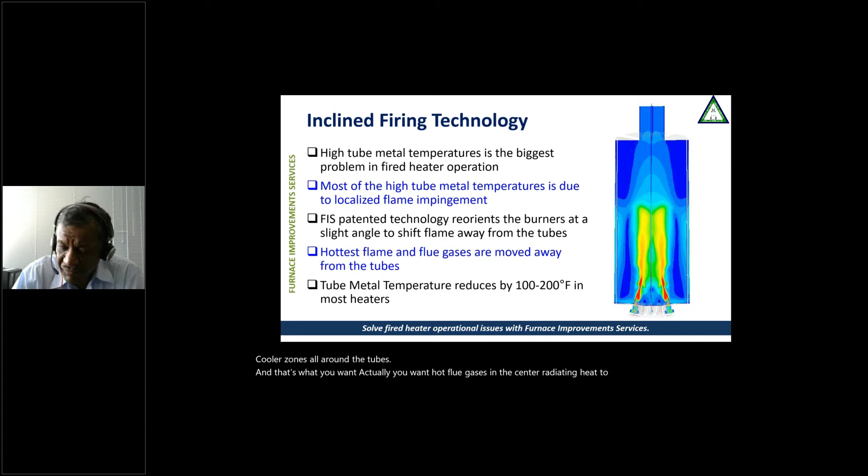This slide shows the temperature profiles, and you can see the flames are in the center and the rest is a lot cooler zones all around the tubes. And that's what you want actually - you want hot flue gases in the center radiating heat to the tubes, having uniform heat transfer.

So our technology is eminently suitable for existing heaters with ultra low NOx burners. We have seen that these heaters were originally designed with standard burners. When the standard burners were replaced with ultra low NOx burners, the heater started having hot spots and flame impingement. In most cases, the burner to tube clearance reduced, causing problems in operation.

It is not possible to enlarge the radiant section to keep flames of the burners away from the tube as possible. And we have overcome this limitation without increasing the cost of the heater, without changing the design of the heater, by putting these burners at a slight angle of about 5 to 7 degrees. Most of the time, you won't even notice it.

Flames of the ultra low NOx burners could be anywhere between 15 to 25 foot long, even taller. So when we incline these burners, these flames start moving away from the tubes, and we increase the clearance between the burner edge, flame edge, and the tube almost like 1 foot for every 10 feet of flame length. If it's a 25-foot flame length, we've added another 2.5 foot clearance between the burner flame edge and the tube, and that's very, very important.

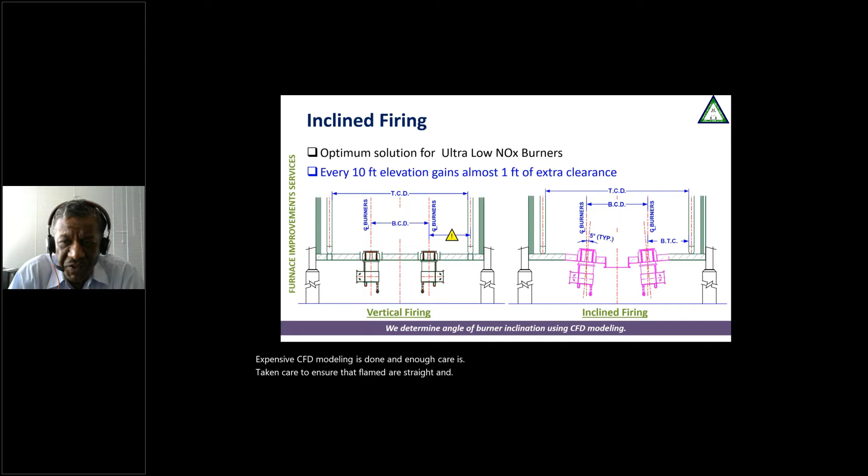We make sure that extensive CFD modeling is done and enough care is taken to ensure that flames are straight and separate. So we have not had any cases of any flames coalescing taking place in any heater.

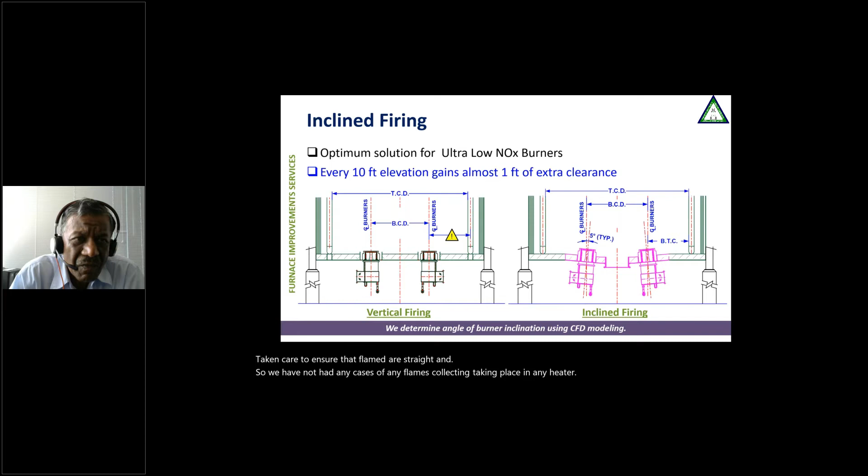Also, the flames are not hot at the bottom, they are generally hot at 1/3 or 2/3 height - that's where they have higher temperature. So it really helps to keep the flames away from the tube. This is at a 7-degree angle.

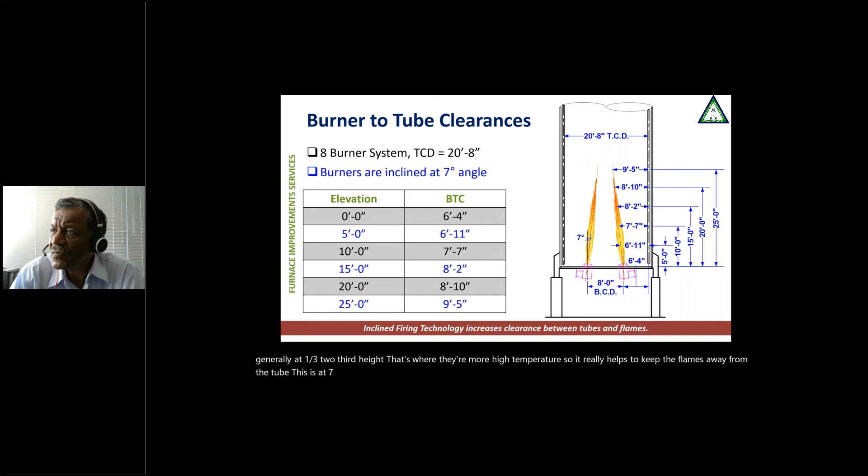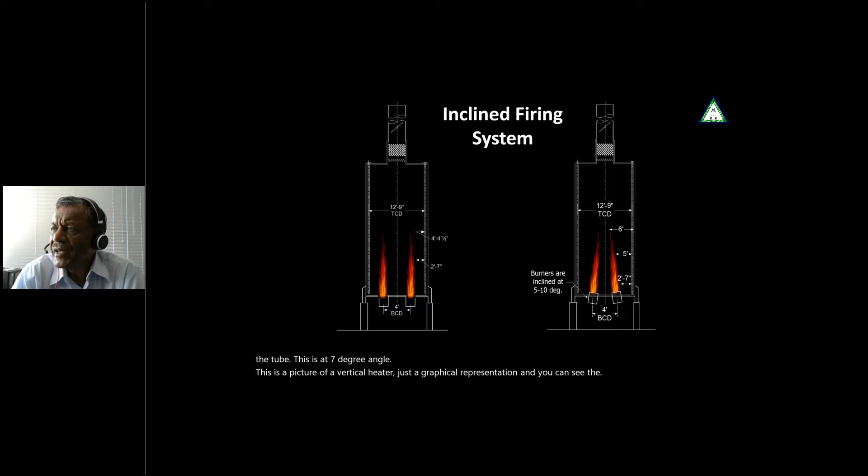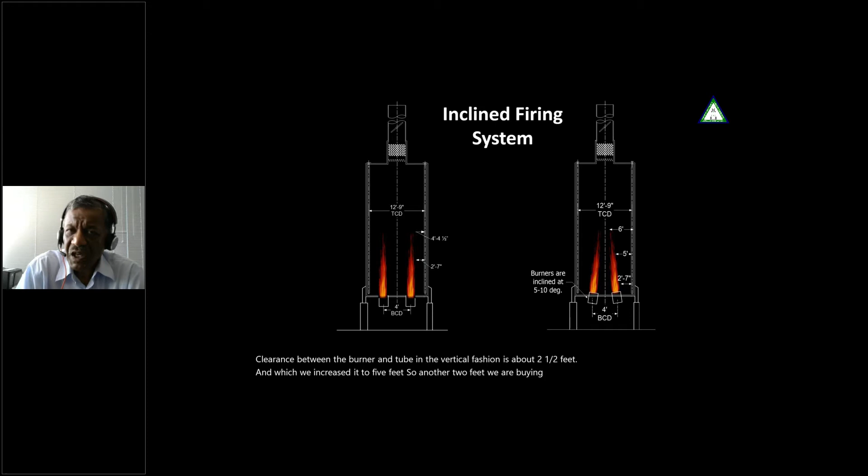This is a picture of a vertical heater, just a graphical representation, and you can see the clearance between the burner and tube in the vertical fashion is about 2.5 feet, which we increase to 5 feet. So another 2 feet we are buying - that's basically what our technology does, just move the flame away.

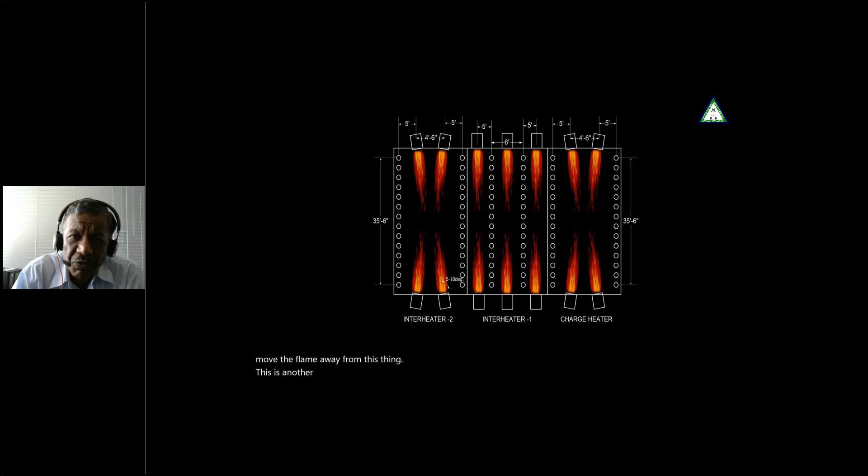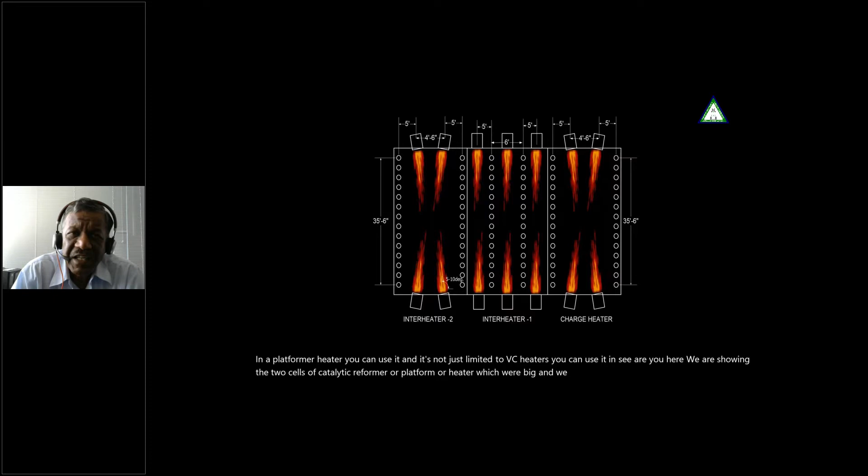This is another one, in a platformer heater. You can use it - it's not just limited to VC heaters, you can use it in CRU. Here we are showing the 2 cells of a catalytic reformer or platformer heater, which were big, and we can use burners in inclined fashion, firing towards the center and moving the flames away. Very simple concept.

Double-fired coker heaters have become very common in the industry. We find many are suffering from high tube metal temperatures from day one. The high tube metal temperatures have been caused by long burner flames and inadequate burner to tube clearance.

We did a study for a client on their double-fired heater and found that the burner flames were almost touching the tube, or almost like 6 inches away. We modeled the same burners at a 5 to 7-degree angle, and we were able to see a big difference in tube metal temperatures. The flames basically moved away from the tube and started hugging the refractory. We increased the clearance by almost another 2 feet, and the TMTs came down by more than 100 degrees, which is a big number for a coker heater.

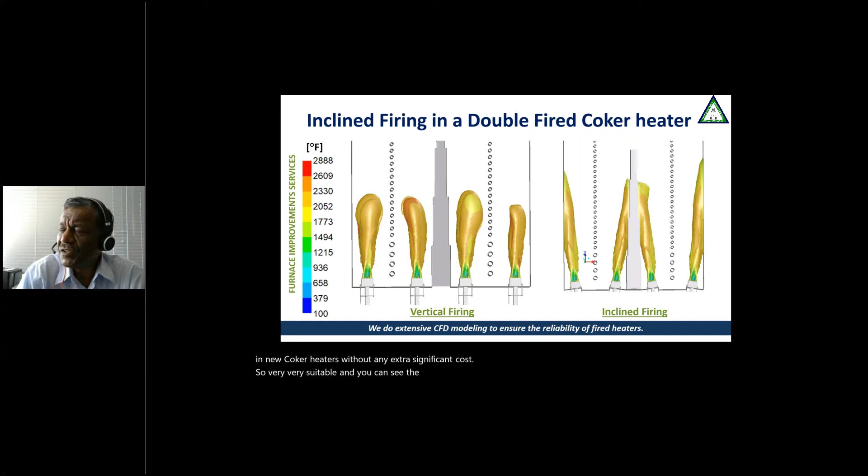This firing pattern can also be used in new coker heaters without any significant extra cost. So very, very suitable. You can see the flames over here. This is an actual study we did for one of our clients.

This is another heater we have done, for horizontal tube end wall fired heaters. We don't build too many end wall fired heaters, but this is an old crude heater with end wall fired burners. The heater was experiencing high tube metal temperatures, and we did the CFD to show, and you can see yourself the color of the flames. Red is basically much more concentrated in the center, and the tubes are experiencing a lot lower temperatures.

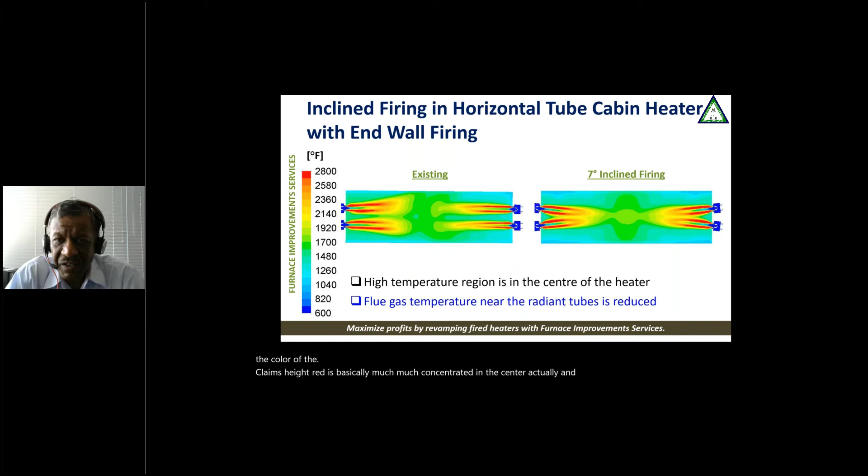We even did it in ethylene crackers. We did a modest CFD model of a furnace, and you can see the difference between vertical firing and inclined firing. In our model, the flue gas temperature is a lot lower, almost like 100 to 150 degrees lower, and the tube metal temperatures are also lower, with the flames firing a lot more towards the wall.

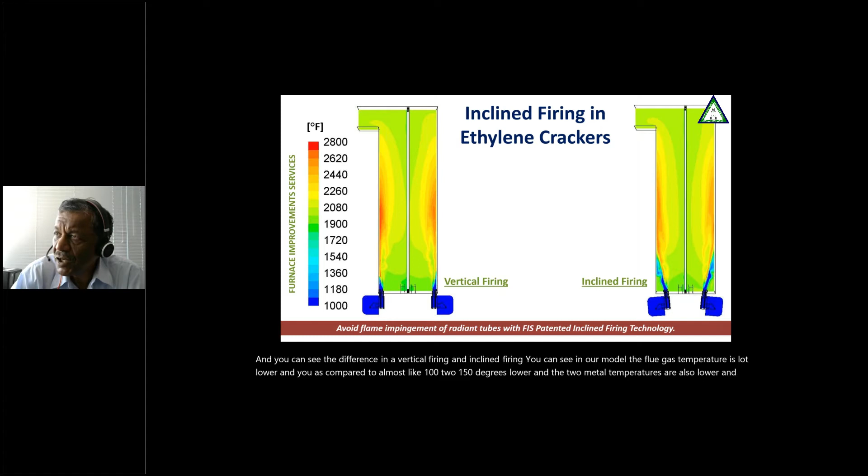So it can even be done in ethylene crackers if high tube metal temperatures are an issue. And I know ethylene crackers have a big issue with tube metal temperatures.

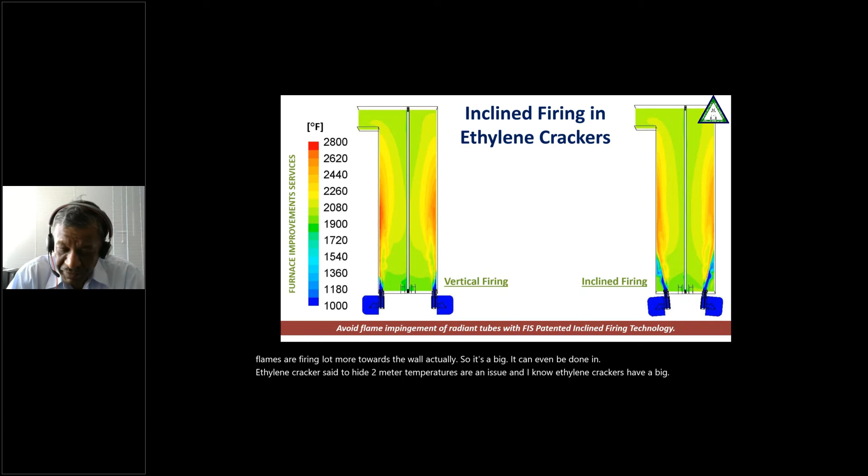So today we are going to be talking about a case study on a crude heater. This is a case which I first told you about when we started. We got a second chance to look at that heater again in 2014. The client had gone ahead and replaced the existing burners with new ultra-low NOx burners and air plenums in 2011. Even after doing that revamp, they were still having lots of issues in the crude heater. So they contacted us in 2014, and we did the study and later on the project.

This was a vertical cylindrical balanced draft heater with a common air feeding system. The heater was originally built in 1976 and revamped in 2000 and again in 2011. The client was facing a number of problems, including capacity limitation due to high tube metal temperature. The situation was so bad that they had wrapped some of the radiant tubes in ceramic fiber blanket. They were having flame impingement, which was leading to soft coke deposition in the radiant tubes.

The client had other issues like combustion air maldistribution across burners, and they could not get full capacity. So we did an engineering study to improve the reliability of the existing crude heater, improve performance of existing burners, and mitigate flame impingement. They wanted us to restore the capacity of the heater. The heater was facing combustion air shortage during natural draft operation. So we looked at several ways of improving the heater reliability.

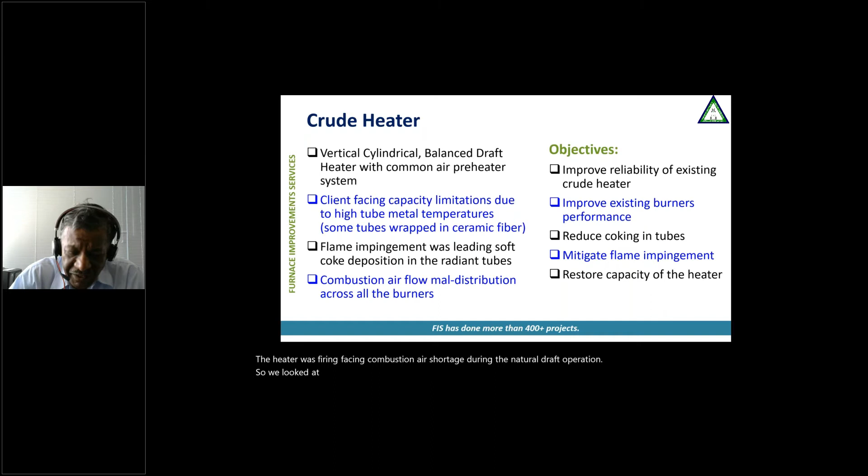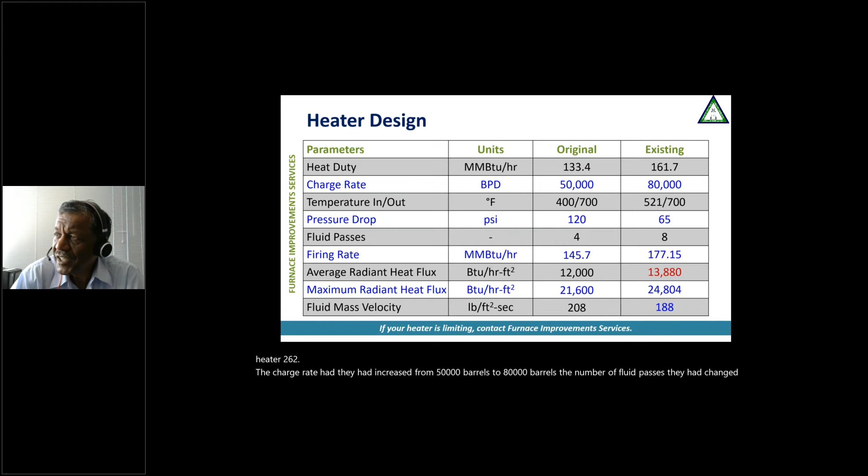So this is the heater design, original heater design versus existing heater design. Original was 133 and they had already expanded the heater to 162. The charge rate they had increased from 50,000 barrels to 80,000 barrels. The number of fluid passes they had changed from 4 to 8. The flux had increased from 12,000 to almost 14,000.

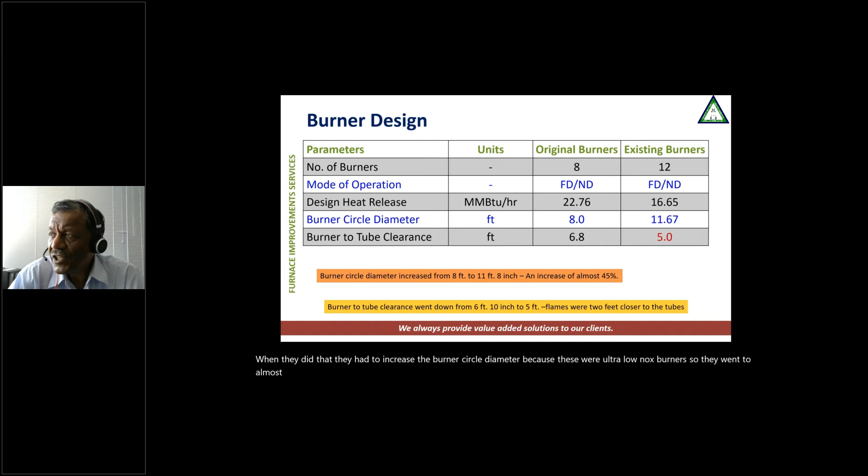On the burner side, the original heater had 8 burners of 22 million BTUs each at 8-foot BCD, and they had changed to 12 burners of 16 million BTUs each. When they did that, they had to increase the burner circle diameter because these were ultra low NOx burners, so they went to almost 11 foot 8 inches, an increase of 45%. As a result, the burner to tube clearance was lower by about 2 feet, and this was not even meeting API.

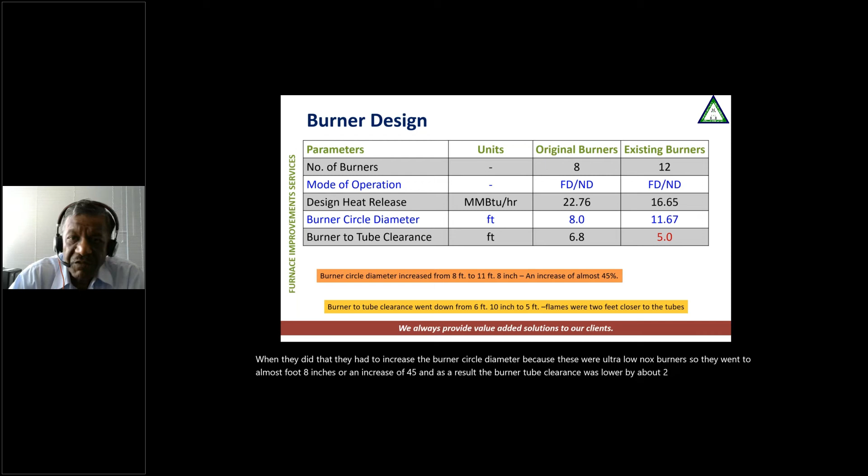So this heater, they gave us operating data for it. Let's look at the tube metal temperatures. They were exceeding 1100 and sometimes even 1200.

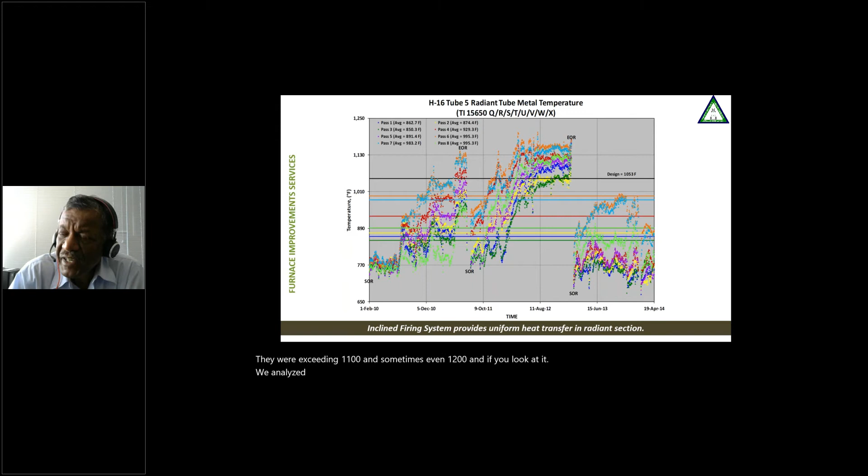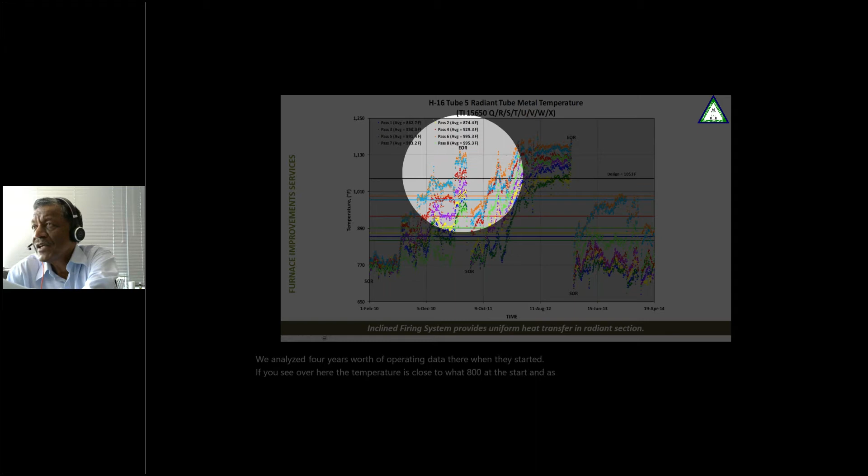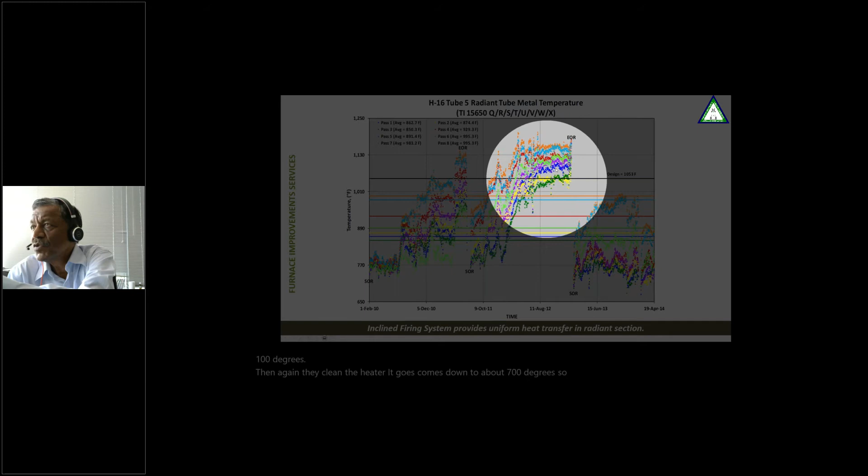We analyzed 4 years worth of operating data from when they started. If you see over here, the temperature is close to about 800 at the start. As you keep going up, it goes up to about 1100 degrees. Then they clean the heater, and it comes down to about 700 to 800 degrees. Then again it goes up to 1100 degrees within a span of 1 year. Again they clean it, so it was becoming a big problem for them.

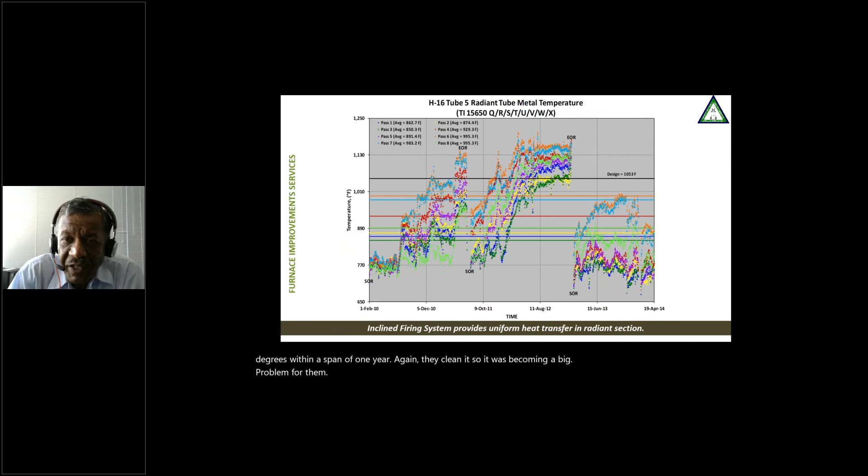You expect crude heaters to be running for at least 5 years. If you have to shut down the heater in 1 year, it's going to cause a lot of profit loss. So the high tube metal temperatures were really, really acute.

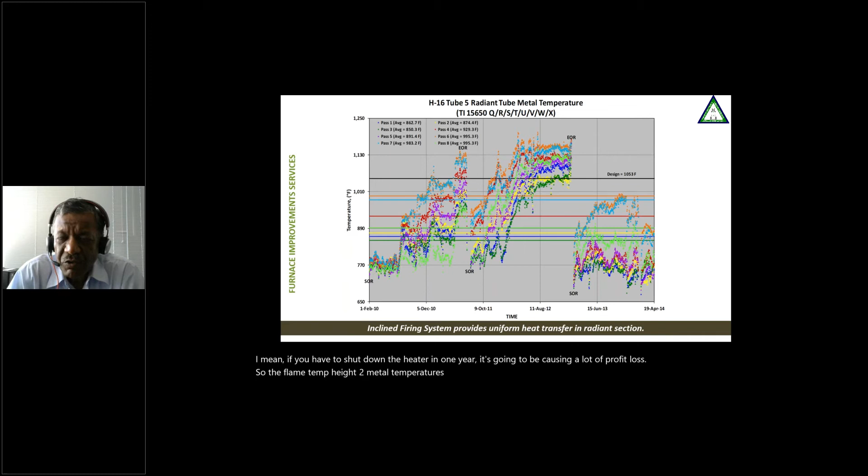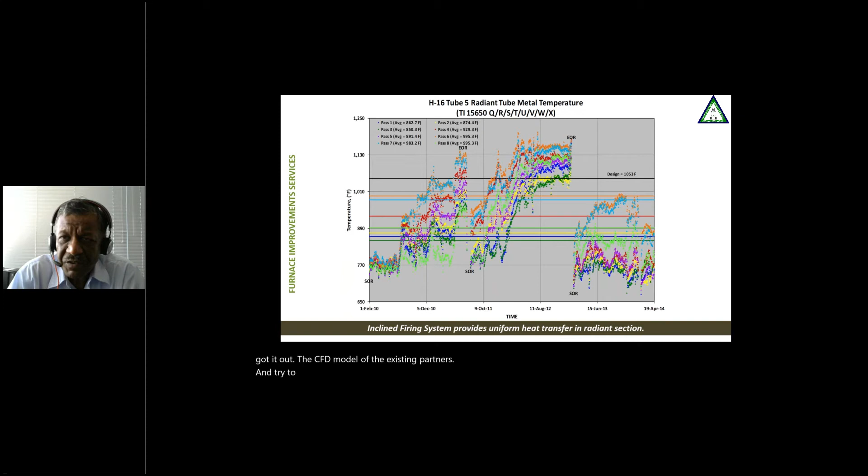We carried out the CFD model of the existing burners and tried to understand what the problem is, and then we worked on the solutions.

The client had 3 major shutdowns, in September 2010, July 2011, and January 2014. They were not able to get an outlet temperature of 700 degrees, running 57 degrees lower. The maximum tube metal temperature was exceeding the design value by almost 150 degrees, so they were almost reaching the maximum allowable tube metal temperature. The heater operation was severely limited, that's basically what the situation was in this crude heater.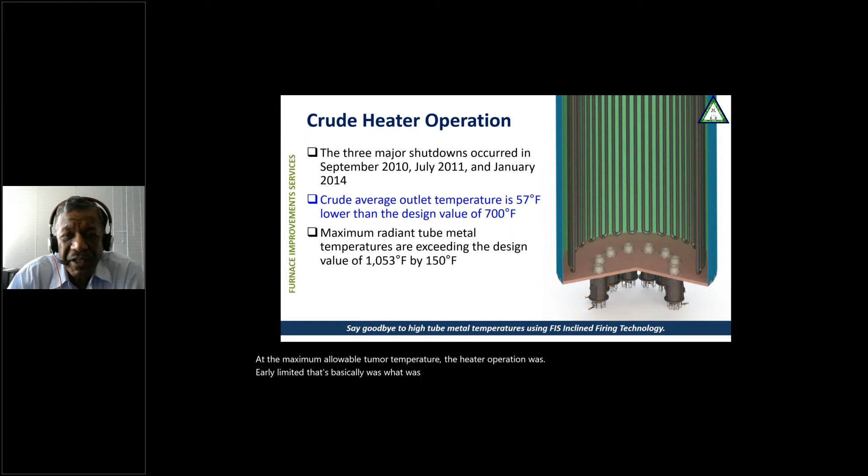This crude heater was a vertical cylindrical heater with a 22-foot tube circle diameter and 63-foot height. Burners were installed at 11-foot 8-inch burner circle diameter. The burner-to-tube clearance should be 5-foot 6-inch, but they only had 5-foot.

When we started looking at it, we said we would like to change the existing burners and put them at an angle. So we went in with new ultra-low NOx burners and did CFD modeling at a lower burner circle diameter to increase the clearance from the burner to tube, at least meeting API 560.

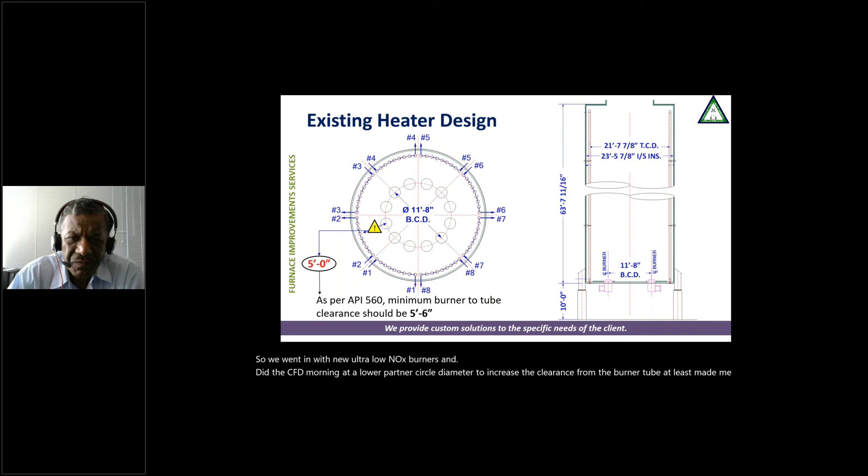So we analyzed the problem and recommended some simple solutions. The first was how to solve the flame impingement problem. We said we'll put new burners on a tighter BCD, use inclined firing, and use CFD to optimize the BCD as well as the inclination. We ended up doing about 6 iterations of different angles and different BCDs to arrive at the best combination.

We looked at the plenum and redesigned it, simplified it, and made sure all the burners are getting an equal amount of air using CFD. They were having limitations on natural draft, so we put fresh air doors, redesigned and relocated. They were also having combustion air limitations, so we recommended a new FD fan of higher air capacity. So that's basically the modifications we did for them.

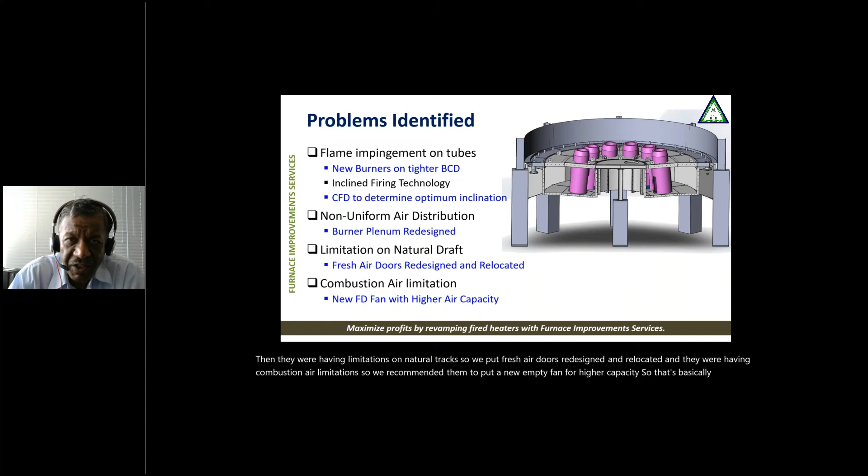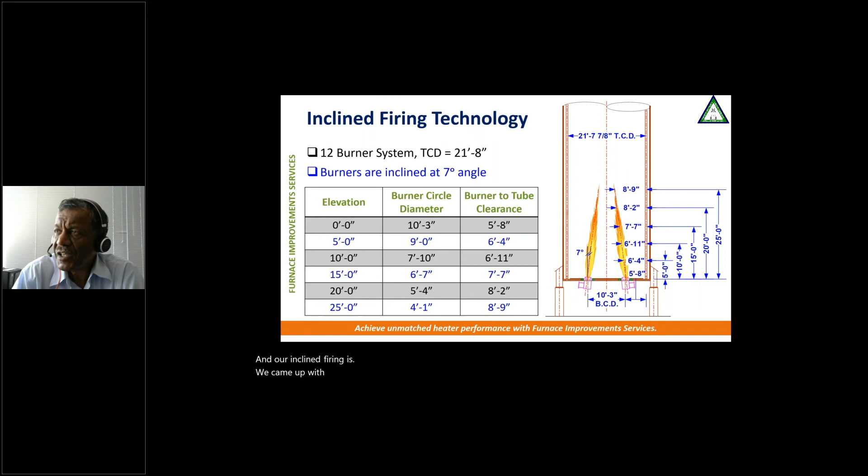Our inclined firing design came up with a 10-foot 3-inch burner circle diameter, with burners installed at a 7-degree angle. We started with a 5-foot 8-inch clearance, a little more than API 560, and by the time we got to the 25-foot flame length the burner vendor had promised, we had an additional 3 feet, giving us an 8-foot 9-inch clearance.

So we were able to create, even between the burners, a big gap.

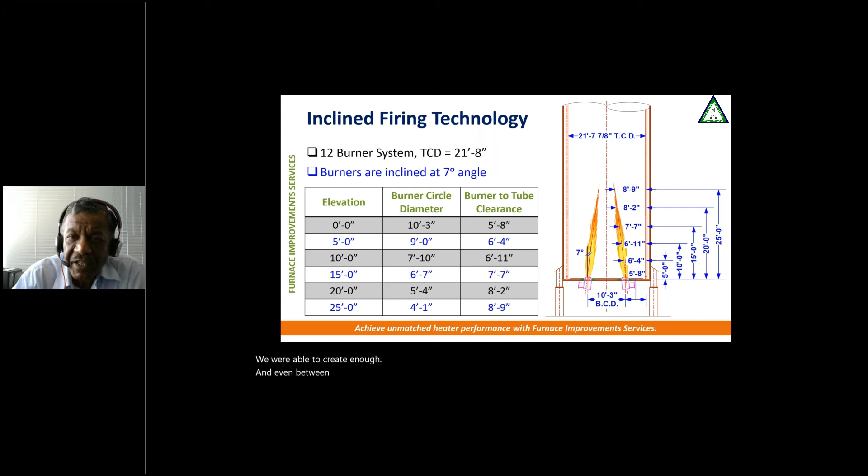Now I want to show you some slides of the CFD model. We did extensive CFD modeling to come out with the optimum BCD and burner angle. The existing configuration had a big flue gas recirculation taking place in the center, and this recirculation pattern was pushing the flue gases down straight into the tube.

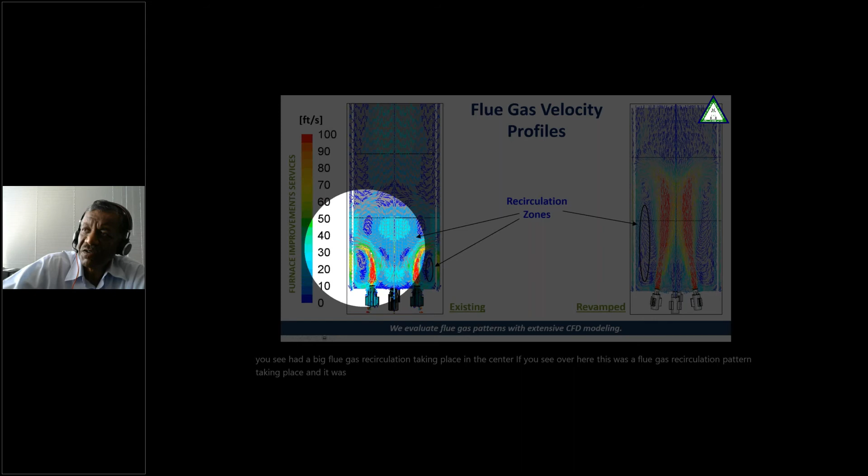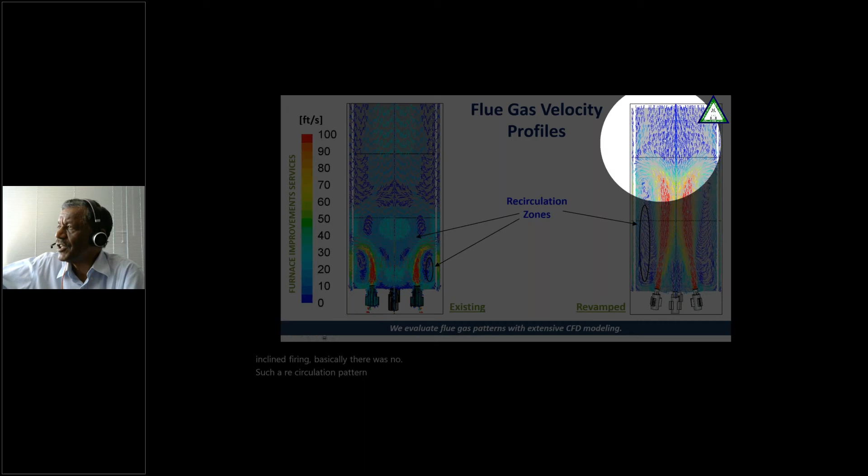That's basically what was causing the high tube metal temperatures or hotspots. If you look at our design with inclined firing, there was no such recirculation pattern forming near the tubes; it formed much higher up, in the upper third. You can see that difference side to side.

Also, in the existing design, the top half had very low temperatures. In our design, we tried to make it a lot more uniform. That was another major improvement we achieved by putting burners at an inclined angle.

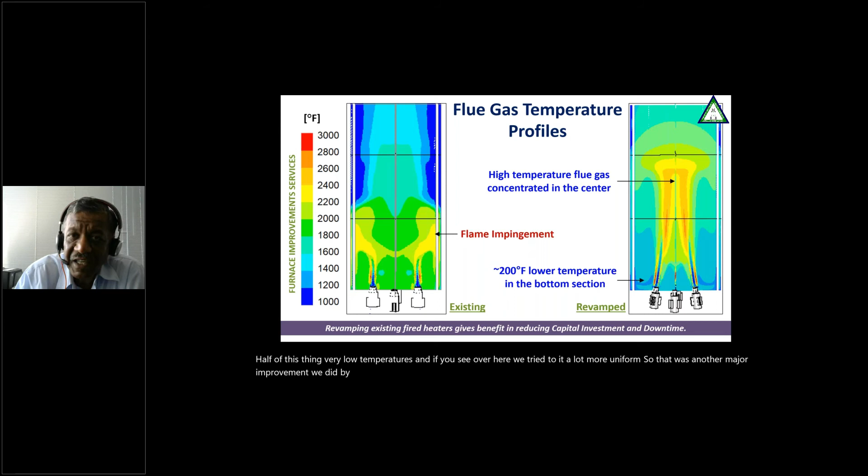The good thing with CFD is once your model is built and the simulation completed, we can study the flue gas patterns, temperature, and CO concentration at any cross section, horizontal or vertical. We compared flue gas temperature profiles at every 5-foot elevation.

At 5 foot, you can see the comparison side by side. At 10 foot, you'll see the hot flue gases are in the tube -- there's a total, stark difference between the two configurations.

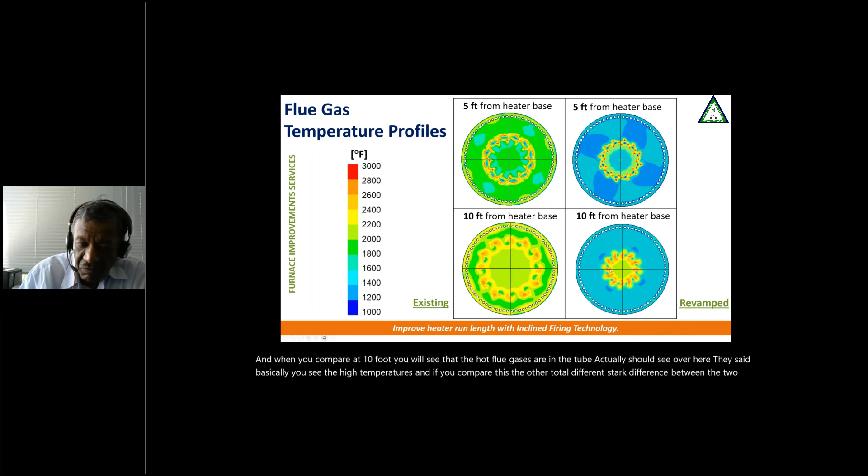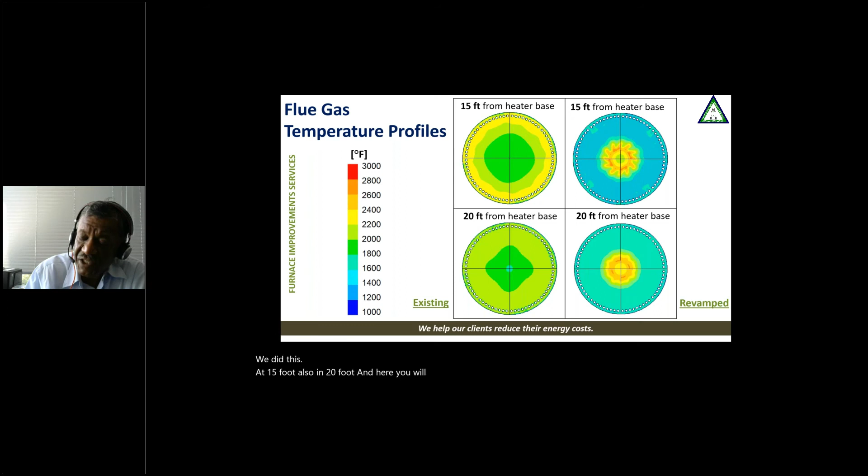We did this at 15 foot and also at 20 foot, and here you'll see something very strange happening: the cold flue gases are in the center and the hot flue gases are actually outside, in the existing configuration.

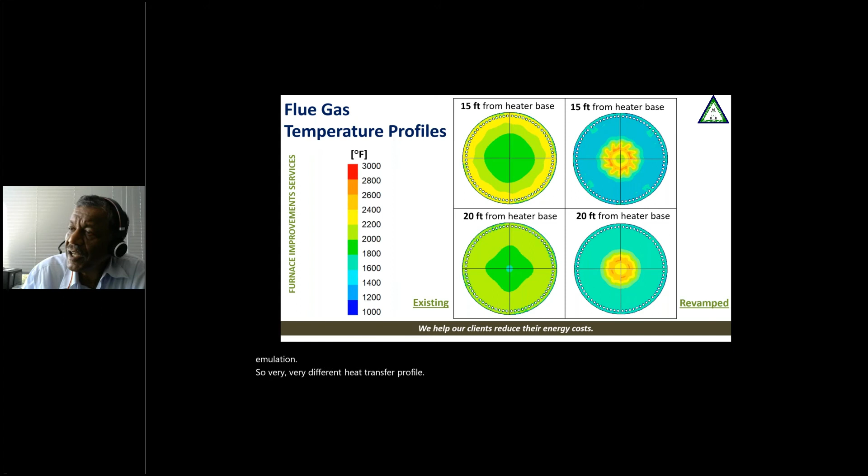Whereas in what we came up with, the hot flue gases are still in the center, cold flue gases outside, the same at even 20-foot elevation. So we got a very different, much more uniform heat transfer profile with inclined firing. We did this analysis even at 30 feet and 40 feet, and you can see the difference.

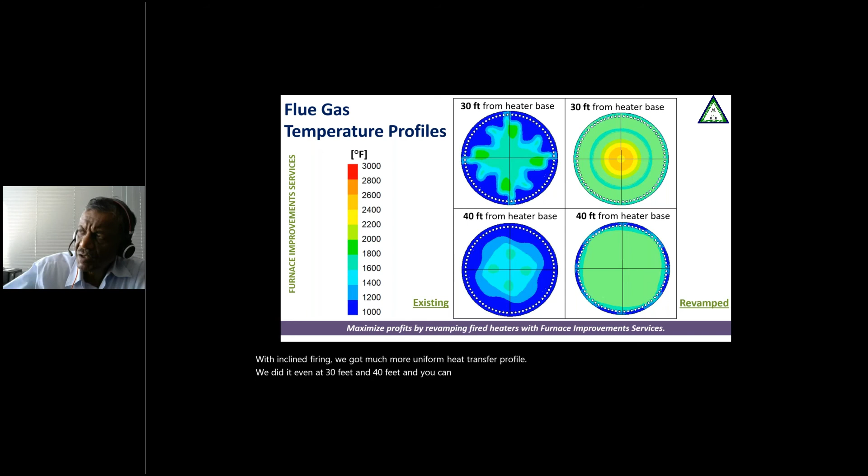I don't have to explain to you, they are all self-evident. We also looked at CO concentration, and typically in the industry, any concentration of more than 2000 ppm or red color is considered flame.

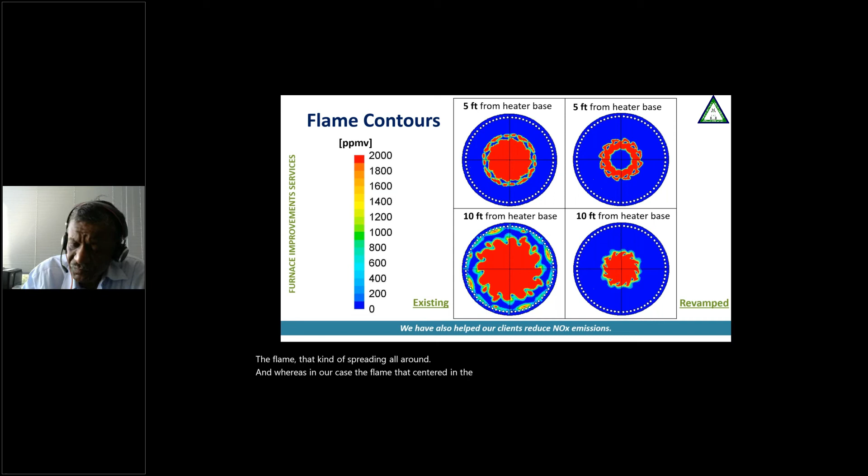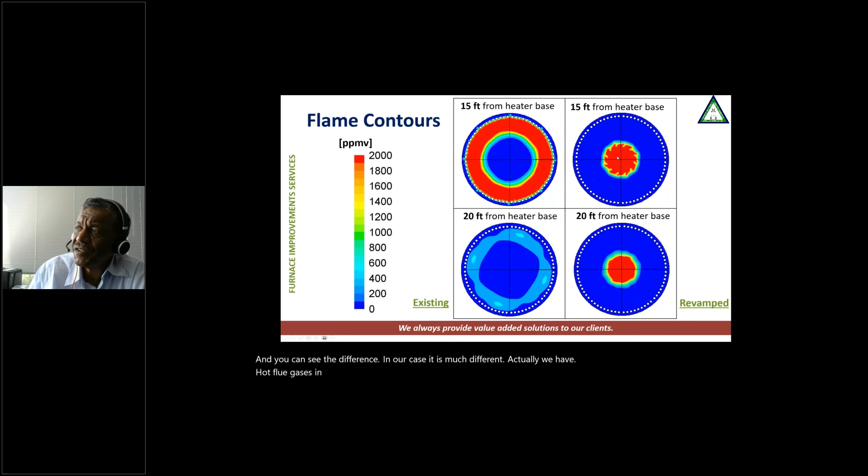We have hot flue gases in the center, the flames are in the center, and cold flue gases, no CO outside. So the flames are kind of restricted.

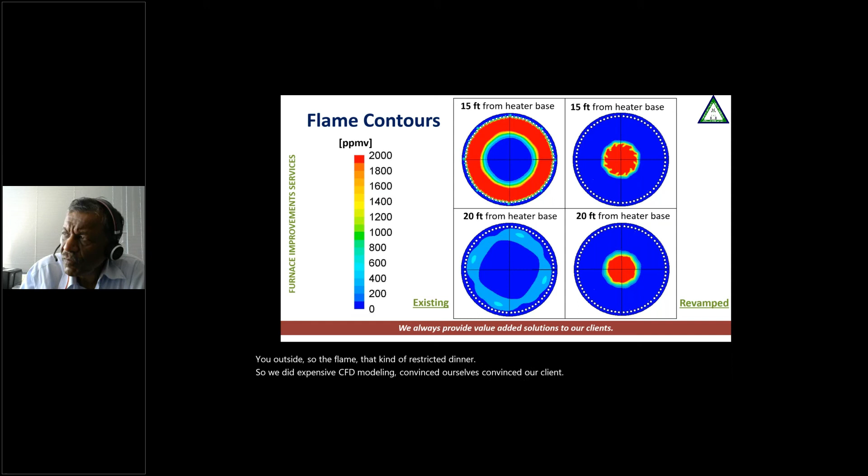So we did extensive CFD modeling, convinced ourselves, convinced our client to ensure that once we put these burners, high tube metal temperatures will be history. You won't have any issues.

So in CFD, typically anything more than 2000 ppm or 2500 degree flame temperature, flue gas temperature is considered as flame. You can see the existing case where we have these flue gases, the flames impinging on the tubes, and that's where they were having this issue. It was almost like a cloud into the tubes.

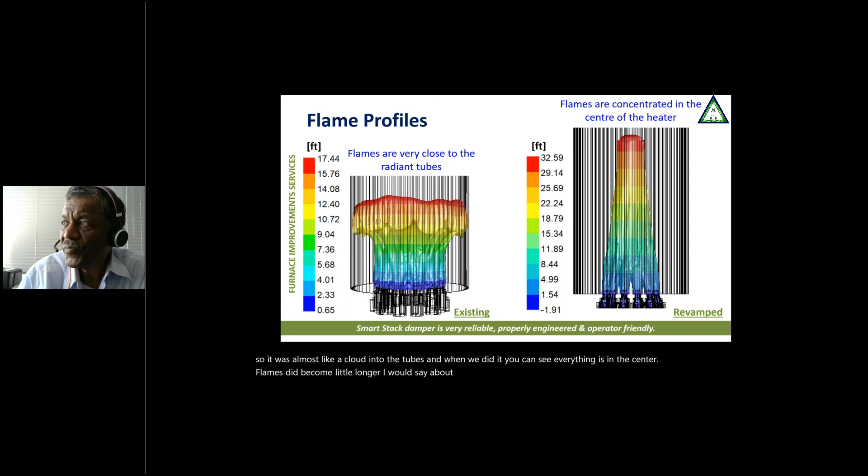And when we did it, you can see everything is in the center. Now the flames did become a little longer, about 4 or 5 feet, but everything was contained in the center. We also did several models.

We looked at the TMT models. What we do is we take the FRNC heater simulation output and put it in our CFD model, Fluent model, and merge the two, or marry the two. And then we see here the flux radiant tube metal temperature profile, existing and revamped.

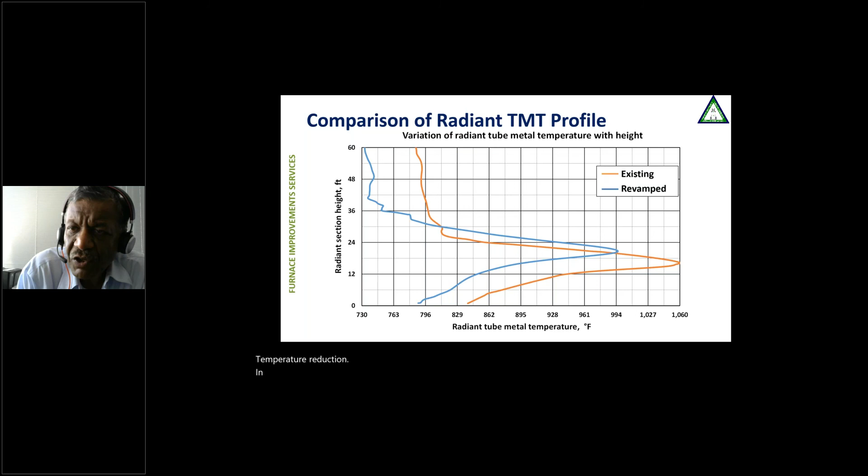I can show you we have almost like 60, 65 degree temperature reduction. Now, in reality, in real life, we got more than 100 degrees reduction in tube metal temperatures. The heater has been operating successfully for the last 5 years without a shutdown. No flame impingement has been observed.

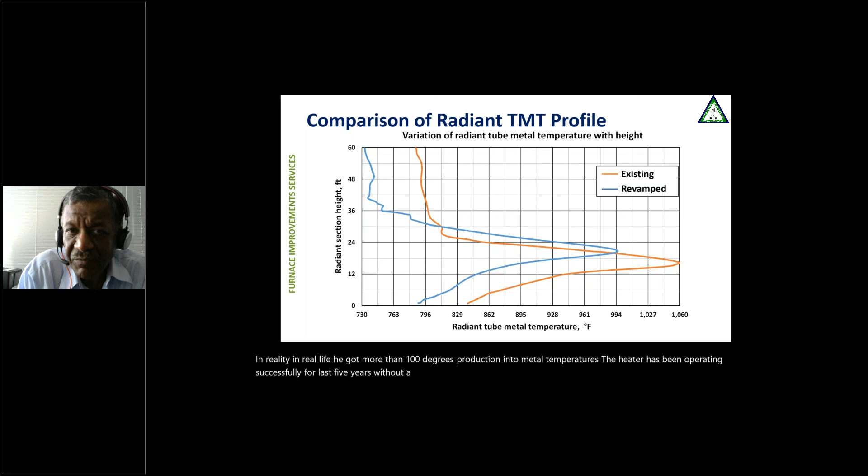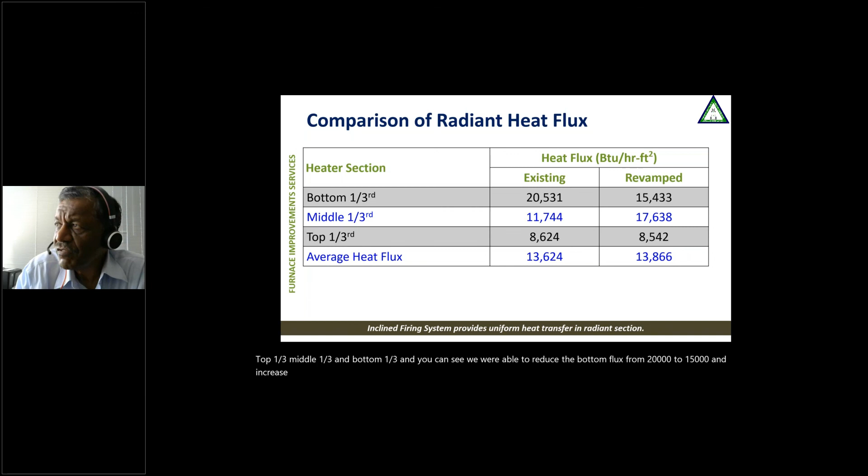This shows you the flux profile in the 3 sections, top 1/3, middle 1/3, and bottom 1/3. You can see we were able to reduce the bottom flux from 20,000 to 15,000, and increase the middle 1/3 from 11,000 to 17,000. So we made it a lot more uniform compared to what they had before.

And the overall heat flux still remained the same, so there was no reduction in heat transfer in the radiant section. I just want to tell you once again.

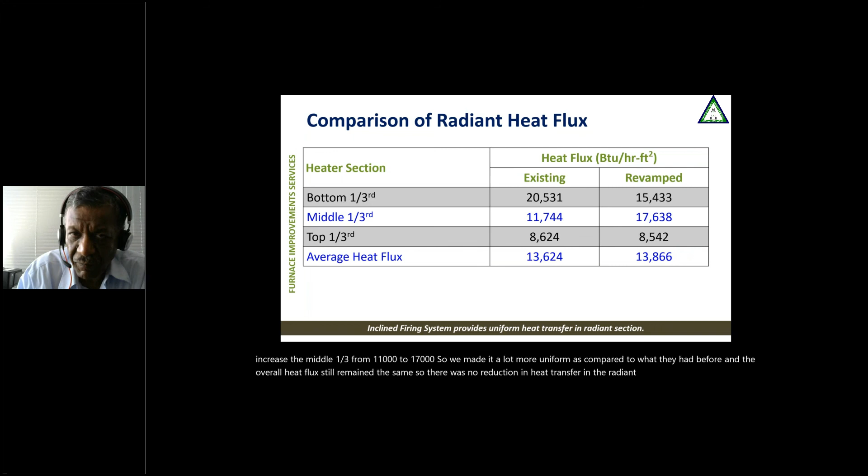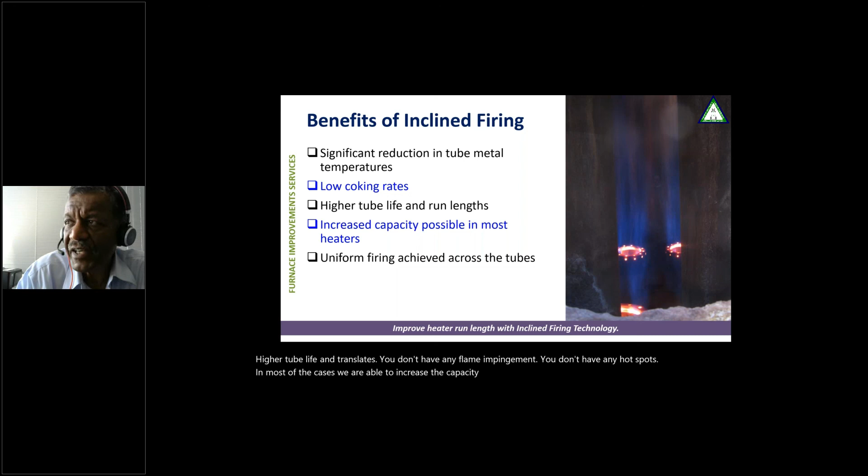So in summary, there are several benefits of inclined firing: significant reduction in tube metal temperatures, low coking rates, higher tube life and run length. You don't have any flame impingement, you don't have any hot spots. In most cases, we are able to increase the capacity also, and uniform firing is achieved across the tube, so uniform heat transfer is possible through inclined firing.

This picture is from our first installation at Delek. You can see the ultra low NOx burners in an inclined fashion.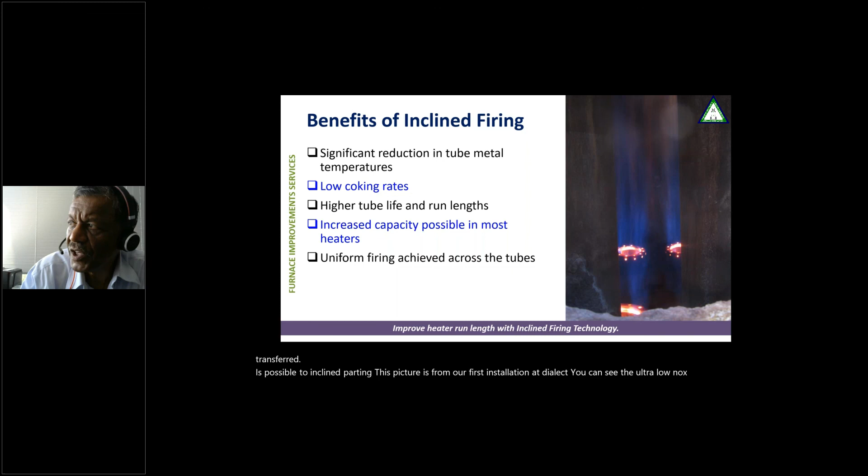This is just to give you a little history of our references. The first 2 heaters, we installed in 2010. Then later on, we installed it at a very large crude heater at Citgo Corpus Christi, which was having tube failures. We installed this in 2012.

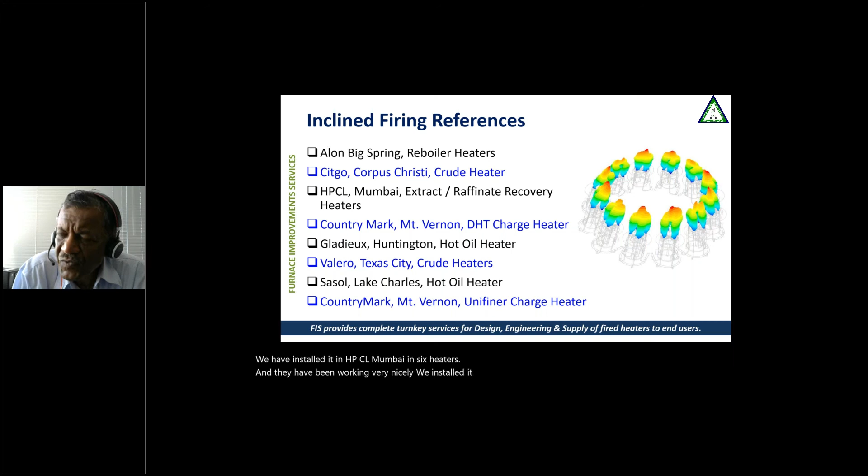We have installed it in HPCL Mumbai in 6 heaters, and they have been working very nicely. We installed it in CountryMark DHT charge heater, and when we did that, we increased the capacity of that heater by 60%.

We did a new hot oil heater for Gladieux with 6 burners at an angle. Valero is the one which we presented as the case study today. Then we did another project at Sasol - this was a brand new heater where we put 12 burners in inclined firing. That heater has started, and all these projects have been working very, very successfully.

I just want to let you know that this is a very simple concept. That's what we wanted to show you today. We are very confident that if you use this technology, you will get rid of hotspots and flame impingement.

You will be able to extend the life of tubes, you will have very good performance. So if you have a heater which is facing issues - it could be any heater, coker, cracking, crude - we would like to evaluate and let you know whether inclined firing is a viable option.